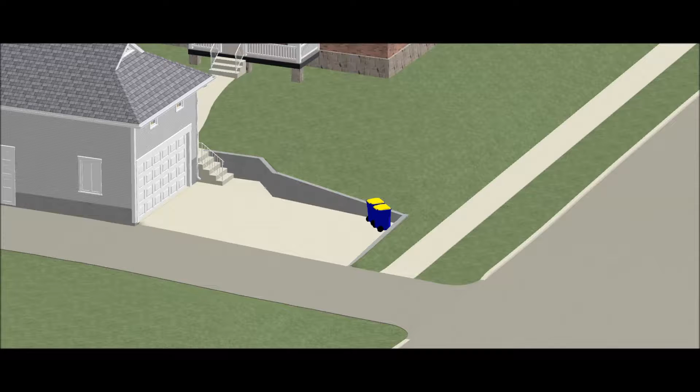and doing this here to see about trash cans. This one here, I will show you how that worked out. Because that land comes down so low anyway at that point, by the time you're reaching this alley here, this particular way of building these walls doesn't offer much screening.

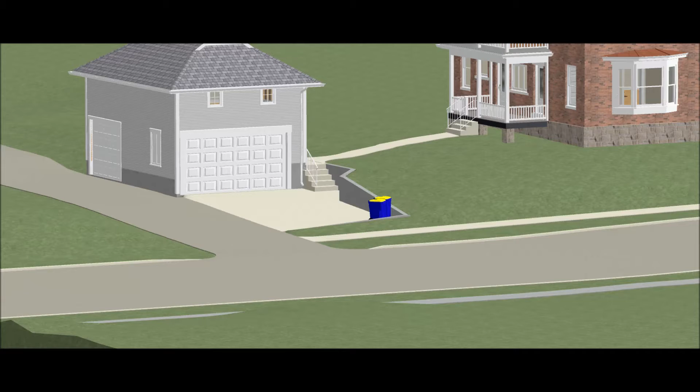That's not to say, though, that a person can't just pour these walls level, and probably contractors would prefer that. If you brought this up, mine is about 45 inches tall, my trash can. So if you brought that wall up to maybe where it was 48 inches high, that would offer the screening.

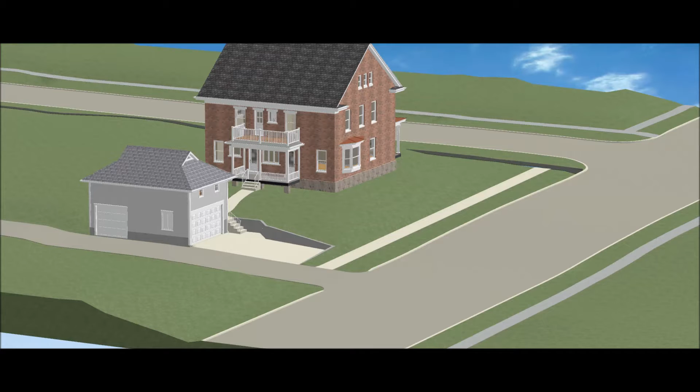And I've shown these walls all along as these 8-inch concrete walls. If you have a contractor that prefers, you can use any number of these landscaping block alternatives like Allan Block and the like. Also, I want to mention this water that you're having out here.

Perhaps that is also run here, because you can actually have a little sink there that empties to the street, as it were. Particularly with its use as an art studio, water would be nice to have up there.

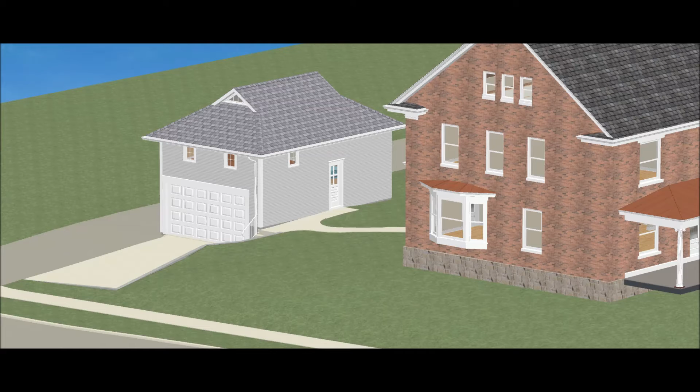Also, not shown, but it probably should be just left this way, if you want to leave this existing door and closet door in place, either block them off permanently or create a little lawn closet inside, that can be done. Similarly, that window can be left where it is, like that.

And this would probably be less expensive. They're not having to have this wood. They're probably going to have some of this wood milled regardless for some of these changes.

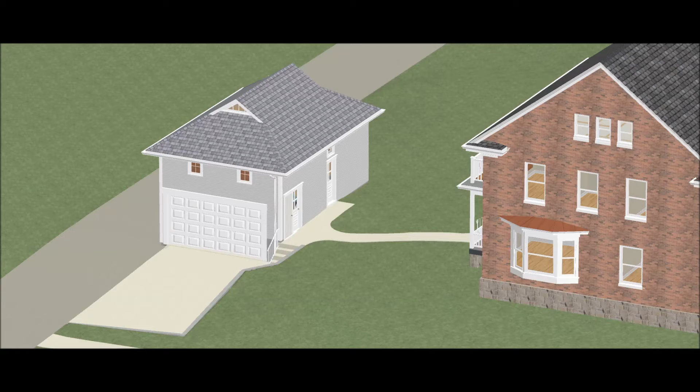Although you are taking out some over on the alley side, so someone will have to figure that out. I kind of like leaving it in place here. Looks historic and is probably less expensive than taking it out.

So regardless of what you do, whether you put these out here, keep this wall high, what you do there, it is nice that the trash cans, because of moving those stairs, can fit here. If you leave those doors in place, then you would just wall them off.

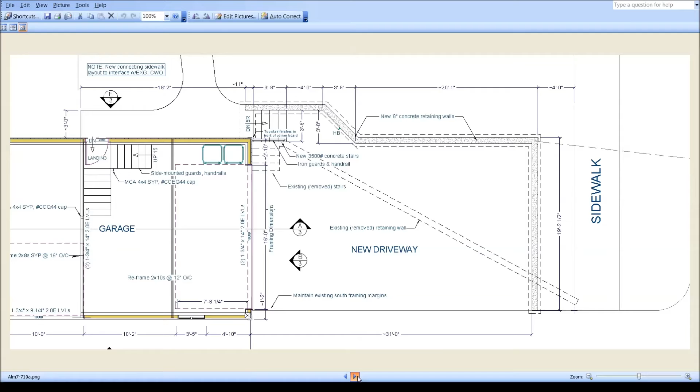But for the rest of the way this all worked out, I'll try to get through this quicker than I've been so far.

I had begun with that landing lower like this, 8 inches lower, one riser lower, but this is an outline of a typical 6'8" at the center and 30 inches wide. This is to access that second place that's up 16 inches, up 2 risers.

So I brought the landing up so that I could bring that second stair, one less tread and riser, and that gave us this here. And this will get either the Fleetwood or the pickup truck under this landing.

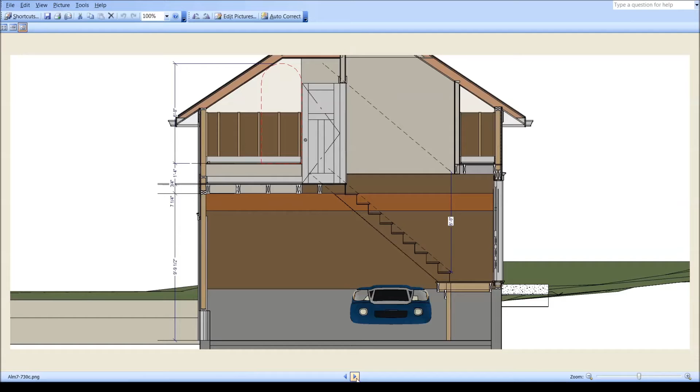This is a game of inches though, so this has to be put together as diagrammed. I rechecked the dimensions of that particular lift, and these are reflective of that. All of this stuff is reflective of that.

Upstairs, when you have that second loft, this piece comes on beyond and connects to 2 spaces. It can be a closet or anything else for that matter.

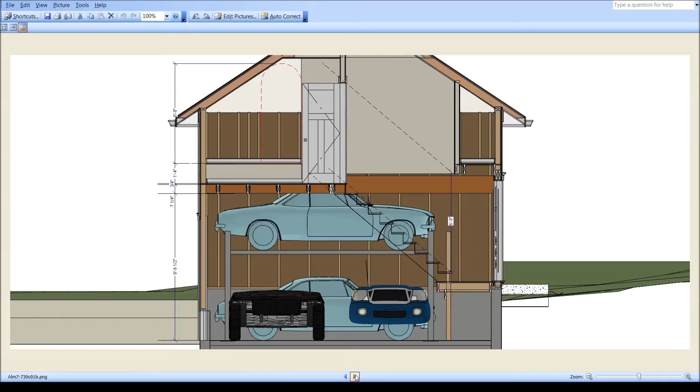So this is kind of what I had ended up with as I began to get the actual construction drawings together.

Here's your passage up there. It's 2'8" wide by 6'8" high. Notice that the stairs though can't come, this door has to swing open, so those stairs have to stop at the end of that door, about 2'7" or so.

And these were just how I finished developing that, whether you do that or not. Actually, the final one I widened that. The final construction drawings as they're now shown, or as currently developed, this is wider.

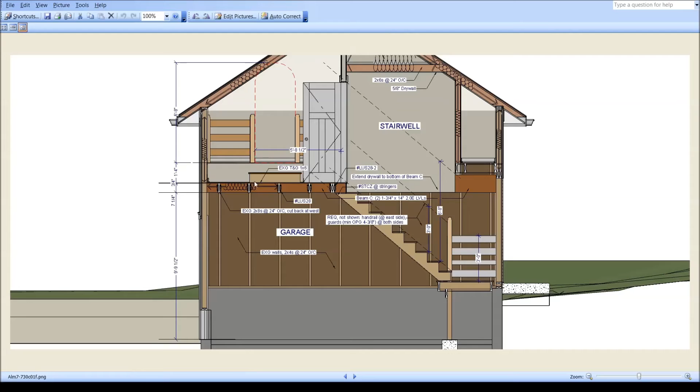This is more like 36 or 38 inches wide, where you still can't fall off the edge of this stair, but it gives you the widest possible access up there while not occupying this whole thing with stair tread or otherwise. Down here you can see how close it is

with this Fleetwood. This is the column here, this 4-inch column is right here, and the Fleetwood is right here. Colorado fits under there. As I said, I modeled them both and either will fit under.

When they install this lift, it ought to be installed to the greatest extent possible that way. I think the pump or jack is on this side according to their diagram, so I don't know whether that can be reversed, but that'll have to be accounted for. I would have this Fleetwood in there before I installed this thing here.

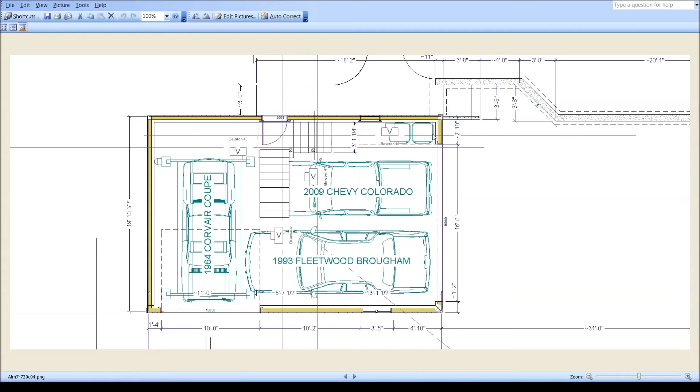I pulled that forward some because the garage door actually closes on the inside of this, so it's just, as I said, a game of inches.

Going this way, I endeavored to get this second floor room to come out this way as far as I could. This is 80 inches here, but this is that main beam, beam B. That's going to have to stop before the stairs.

Finally, this was the final move I made on this, a pretty big change from those earlier plans, from the 1105 plans. This is beam B here, and this is beam C set below those joists. In the final permutation, because you're going to have to build wall up here and so forth, I lifted that up where it's a flush beam.

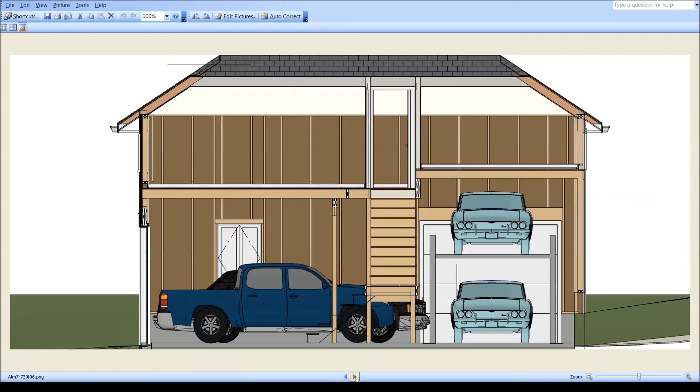There will be one more update of the plans before they go to a permit, and one of the things I will add to that is that this window can just stay there, and we can just ignore the fact that it doesn't look that great being this close to that.

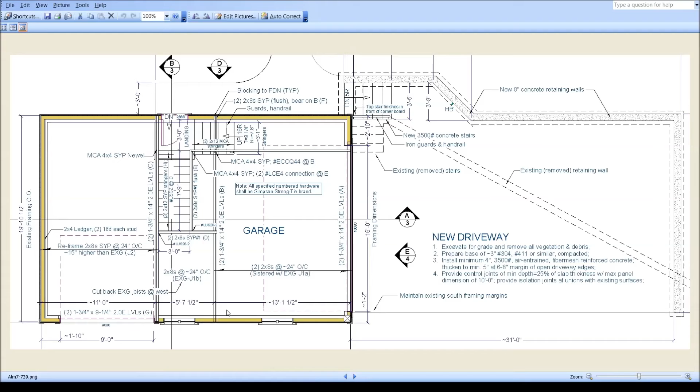It was like that before, and this is how it works out on the plan. So I probably would just leave those in, make a note that they've already been closed off, and you end up with this as elevation C or D or whatever it is on the south.

This is already a nice rigid frame here. Secondly, I want to see, there might be a way - I'm assuming that these are two 2x8s, and I'm assuming they're bearing on this 4.5 or 5.5 inch member over here.

If someone wants to tell me what that is, from the outside of this 2x4 here to the outside of whatever I can't see over here, I can specify a connector for those new 14-inch LVLs that are coming over. Either way, that column needs cut for 14-inch depth.

Secondly, with regard to that second floor, this whole piece here, I don't know if it makes sense for a person to cut those off here and there wherever they need to be cut, and lift that whole platform. I don't know if that makes sense, but that would be allowable under the code. So I'll put that in as an option.